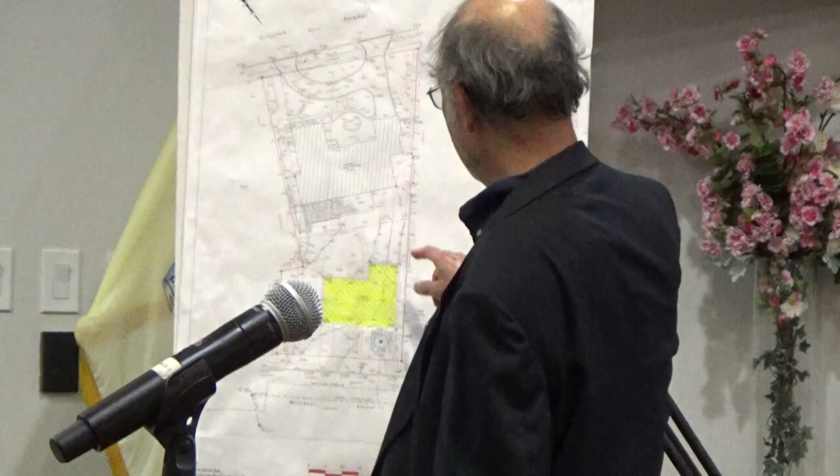I also proposed on the south side of the property, near the subdivision line, a yard drain. The purpose is to collect the water, and all the water collected from the yard drain will flow to the dry well. That will solve the water concern that our client's neighbors have.

How deep is this well? Can I interject? After the last meeting, I met with Ray Cure on Mitchell, and you would not believe how wet it is. Even in his backyard, beyond his backyard, the water just stands.

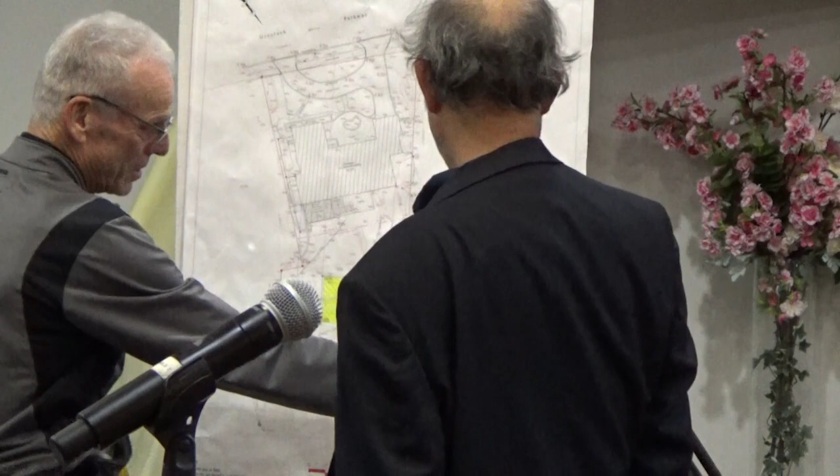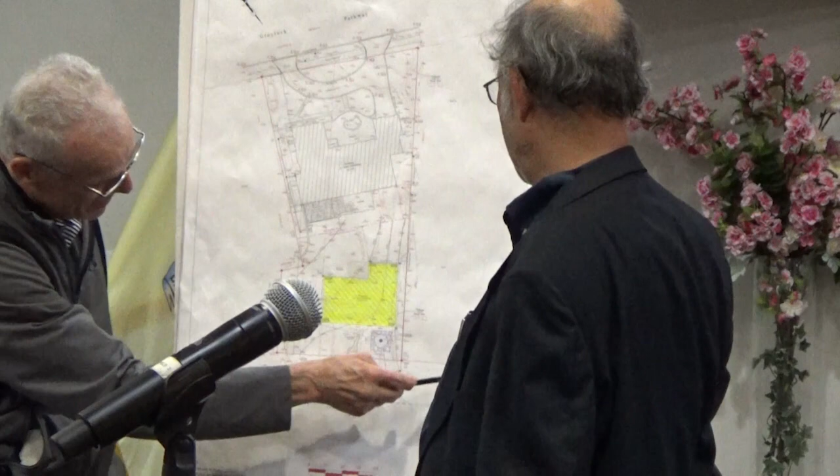I think the solution is, there's an inlet on the street just down maybe 100 feet or so. I think the solution is to get rid of this yard drain, because all you're doing is adding water to the existing water table, which is a mess there. There are some pumps going all the time. The solution is to extend the drainage from here to here, put an inlet here, and then run another inlet up to the yard, swale it, and collect all the roof drains into the inlet. I can work with the engineer, but I think that's the best solution.

And I think at the time I met with Ray, and I forget who the other neighbor was. He's a Yankee fan, I know that. He has a Yankee uniform on. Oh, there he is, okay.

I have just one question. Wait, wait, it's not time for that. I think we talked about it, and I thought that was the best solution for the residents there.

So that would take the water basically off the site. And there's one other thing I want to add to that. Adjacent to the storm pipe that he's putting in, I want him to install a perforated pipe to help collect groundwater and get it into the inlets.

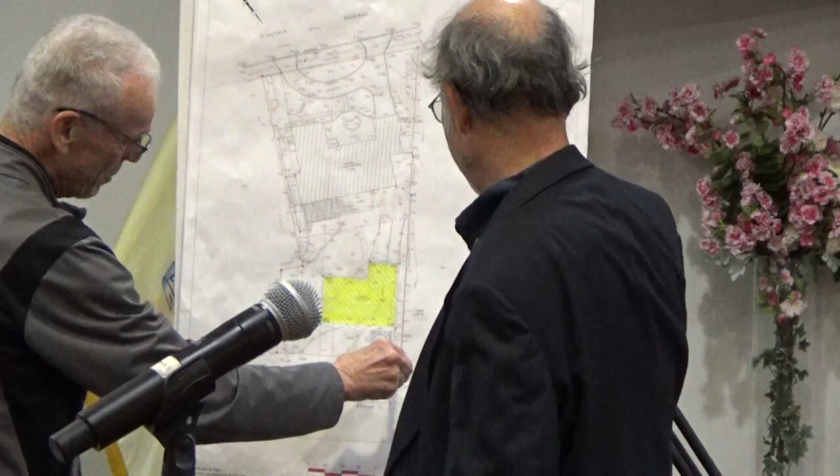So what you're saying, we put an inlet somewhere here? There's an inlet here. You run a 15-inch pipe up here, then run a 15-inch pipe here. You've got to swale all this area and then swale all the property line so it doesn't go to the adjacent property. All the water will flow to here and go to the inlet here. Yes, and then every roof drain's tied to this inlet.

We get rid of this. Get rid of the seep. It's not going to work. You're going to have water. It's going to be filled with water all the time, because this side is higher than this side, right?

So the water will flow to here, but I would say still do the low wall. You can add that. I want to swale between your house, the proposed house, and the property to the west. I can do that, yes.

Okay, so there seems to be some agreement on how that would work, so for purposes of this hearing, I'm going to say, if the matter is approved, that the applicant will work with the borough engineer, town engineer, to create a plan in conformity with what was discussed at tonight's meeting. Correct. Is that okay with you, Tom?

Yes, and just to pre-answer that woman's question: if the inlet's going to be there, I'm going to have him propose to put an E-inlet in, which is a 4x4 inlet, to capture the water that runs behind his house before it gets to the house to the west of his property, okay?

I don't know what an inlet is. Is it a property drain? It's a drain, but it's got a metal casting. It'll be sunk to the ground, and the water will flow into that, capture it, and then a pipe will take it out to the street and then to the other inlet in front of Ray Keir's house. Not like a sewer. It's a storm sewer, not a sanitary sewer. Okay, I can't even picture it.

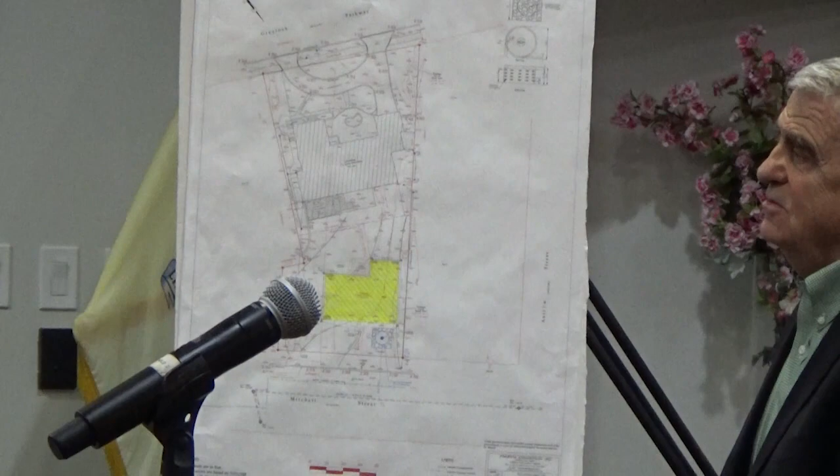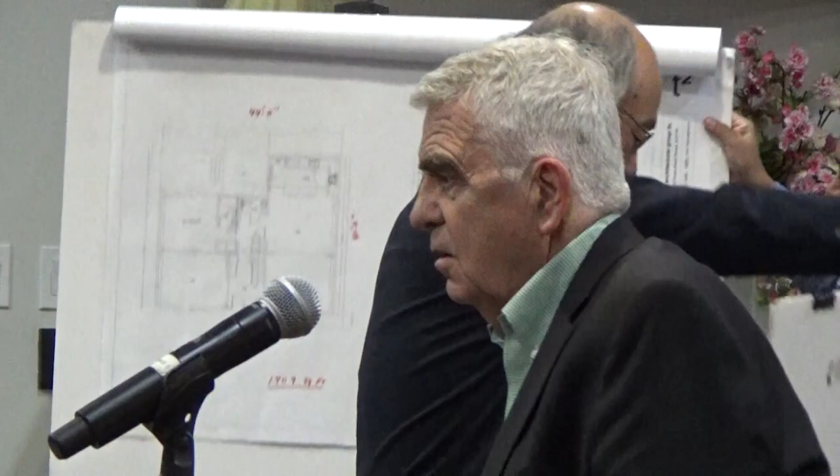Excuse me, Mr. Wu, the architect? Are you the architect, Mr. Wu? No, I'm not, he's the engineer. He's the architect. Okay, I did give testimony at the last meeting. Say your name again, please. John Halsey, architect. I'm just commenting, before we go further, I did give testimony to the architectural plans at the last meeting. I do have questions.

Just to remind you, you're still under oath from the last meeting, okay? Yeah, as far as I'm concerned, yes. Okay, so let me just, so we're clear - no change has been made in the architectural plans since the last meeting? No.

I know Mr. Guines has some questions. Maybe we can, do you want to start with whether or not there's any board questions? Let's start. The clapboard siding - you were thinking something more of a Hardie board. Would that be possible? Yes.

Clapboard siding is a generic term, it could be wood, Hardie. We were just looking at, if we're gonna do something new, on most of our new stuff we like to go with a higher end material. We like to stay away from aluminum, vinyls, that kind of stuff. I agree, I have no problem with Hardie. We like decorative cornice around the edges of the roof, design features, architecturally pleasing, at least on the front facade. The rest of it, we want something better than aluminum or vinyl.

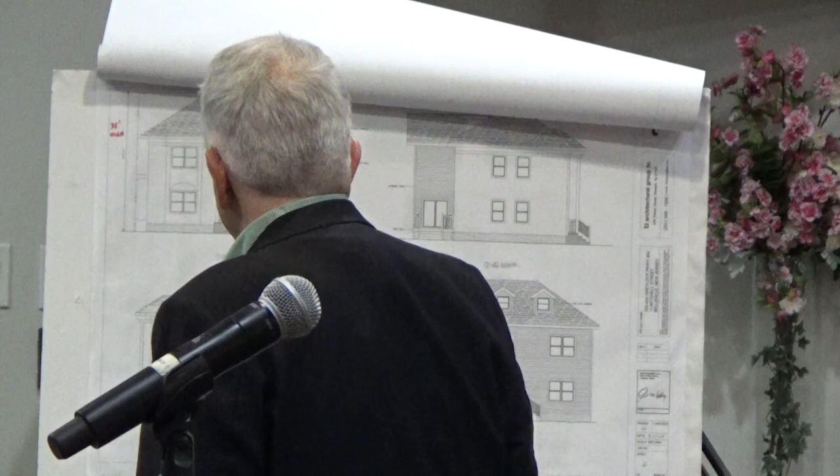Is there any way you can incorporate a little bit more stone into the project? Or brick? It's possible. Could you be more specific? Focus on the front facade, right? Use of a couple different materials - it's fully stucco right now, right? The front, yeah, the footing of the house, and around the sides for a rise. This is a cement foundation basically around the bottom, and then it's the stucco up to the top. Yes. So if you could incorporate maybe 3 different materials

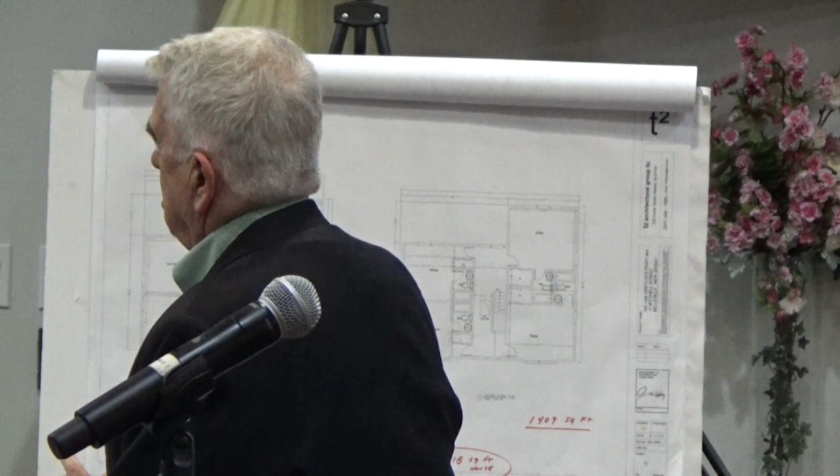into the front facade, and then the sides and rear maybe stick with a Hardie board. Yeah, I said I have no problem with the Hardie plank. Okay, on the second floor there are 4 bedrooms and 4 full bathrooms. Yes. We're thinking 1 master bathroom and then a bathroom for the other 3 bedrooms. We don't feel like every bedroom should have a bathroom. No, I understand. My client, the applicant, requested that to be part of the program, so I would have to leave that up to him.

Are there any other? It's really my thing right now. There's no way every bedroom on the second floor needs a bathroom, it's a little overkill - it's more like a boarding house than an actual house. I mean, sure, I can cut back, but I would like my client - if I can speak to him.

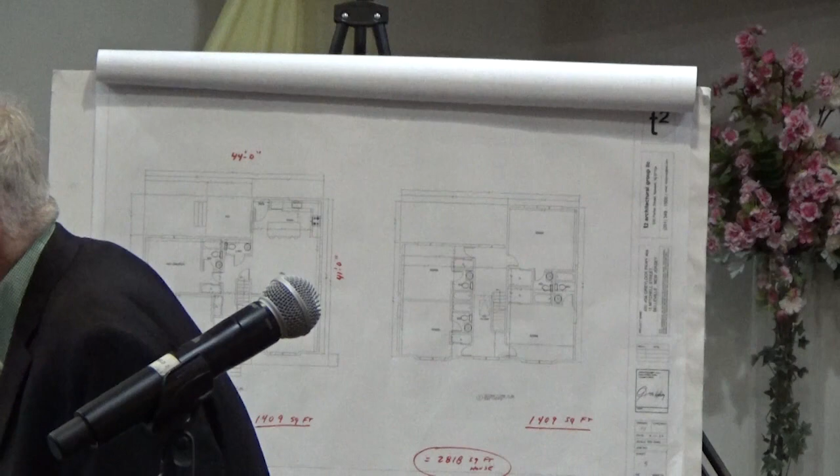Well, let's finish the comments first, because we're talking about the bathrooms. I have a concern that I would like it to come in a couple of feet, because it's sort of on the property line. Can we come in a couple feet? On the side property line? Well, I mean, we're building what's allowed - the footprint is allowable. But you're building something that's big, and the neighbors next door on each side, the houses are not that. Well, if you moved in, it might be more appealing.

Okay, well, before we go further with this, I just want to comment.

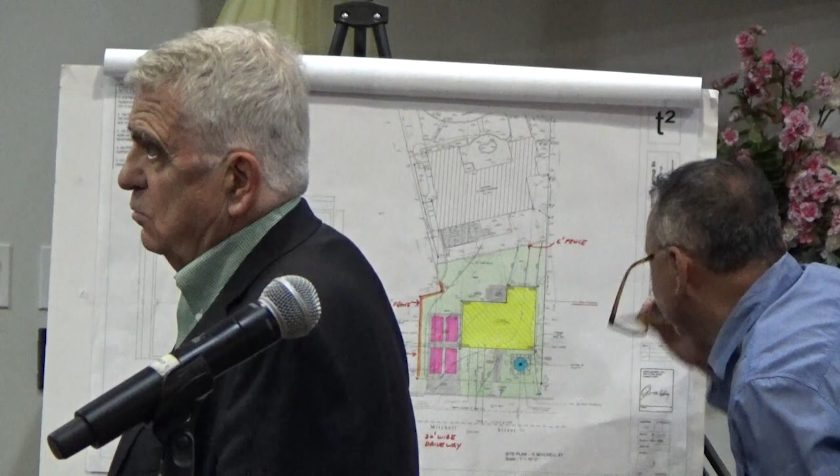I did look at all of Mitchell Street, especially with the intent of understanding the context of the street. I realized the adjacent houses are mainly 1.5-story Cape Cod style houses, but there are also several 2-story houses, some just as bulky, if not more, than this.

So in terms of context, I don't really have a problem with it, but like I said before, we want to please the board, but we are building what's allowed by the ordinance. I understand that, but I'm worried about the neighbors, it being too close, too huge of a house for me. That's just my opinion.

Anybody else? I can go into a little bit of that, so I'm feeling out what you guys are saying. It seems like they want to reduce the number of bathrooms in all the bedrooms. And I'm also seeing that we have 4 parking spaces and potentially 5 bedrooms, which is a mismatch as well. So I think the board would really like to see a parking space per bedroom.

So if we're stretching it a little far right now, maybe if we pull it in a little bit, not only will that make the board happy, but that might also make some of the neighbors happy, if your client is willing to do so.

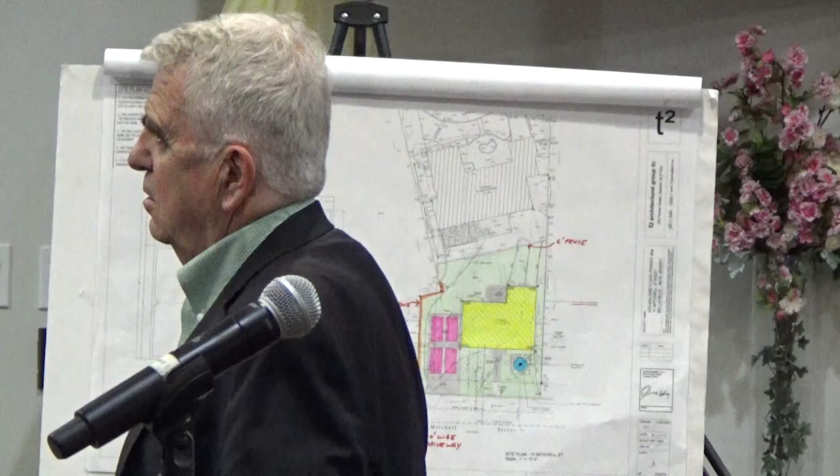I'm telling you that maybe at some point it might be a good idea to take a 5-minute recess and have an actual conversation with your client, because you're getting hit with this without having had a chance to really talk to him, which isn't fair to you either. I think to be fair to you and your client, you're hearing the board's concerns. I appreciate that. I think we should be accustomed to being in this position between you and my client.

Maybe we do that, that's the way my life is. Because we put a couple requirements... are there any other architectural things? Is there anything else, anybody else have any other comments? I would do that before we open to the public for questions, otherwise you're gonna get all questions about this, just stormwater and so on.

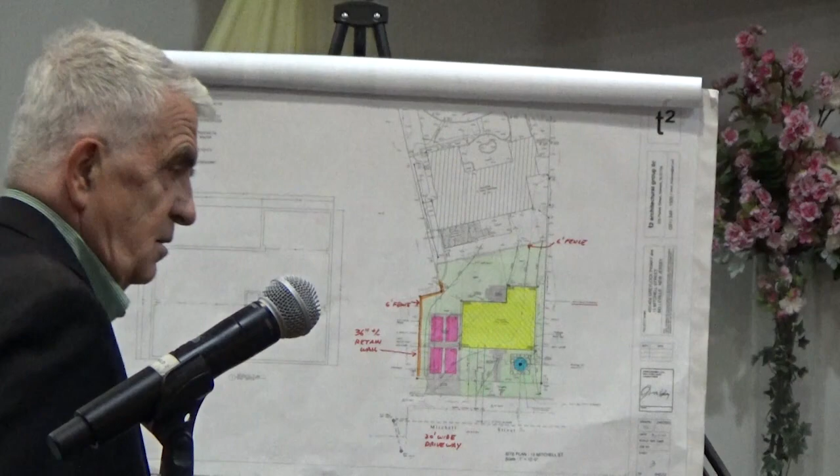You got an opportunity to talk with your client? Yes. Anything you want to add? Yes, I would like to respond to this conversation with the following changes.

We will move in the easterly direction. The east wall, the one closest to the house next door, move that 2 feet away from the property line, so there's a 7-foot side yard. But we would also like to move the other side 1 foot. No, just take 2 feet off the side yard here, but add 1 foot on the shorter segment of the building on the other side.

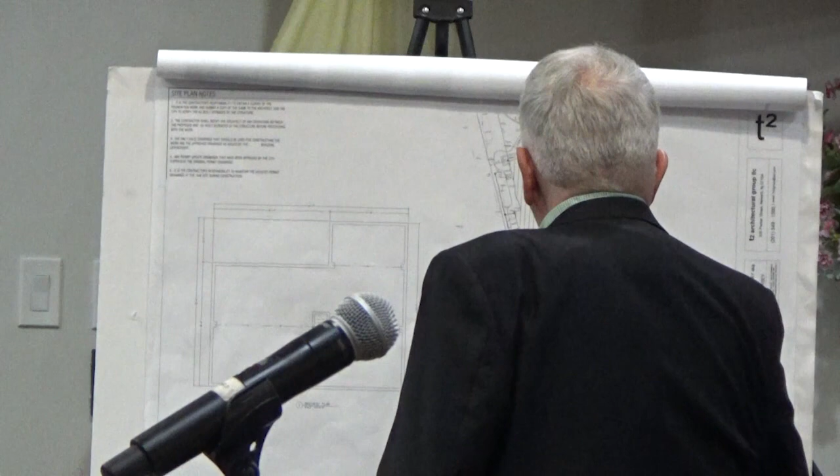I'm not as familiar with that side. Will that create a variance on that side, a 1-foot variance? No, we're not close to any side yard issue, you've got 31 feet on that side, so it's being moved to that side, not creating a variance on that side, and giving an extra 2 feet on the other side.

And there's 31 feet on that side of the house. What was the side you're taking away from now? How many feet were there, and how many now? There's 5, you're adding 2, so it's 5, 7. Sorry, I need this.

Okay, on the site plan, I'm going to use right and left, my directions. On the right side of the site plan, we have a 5-foot side yard.

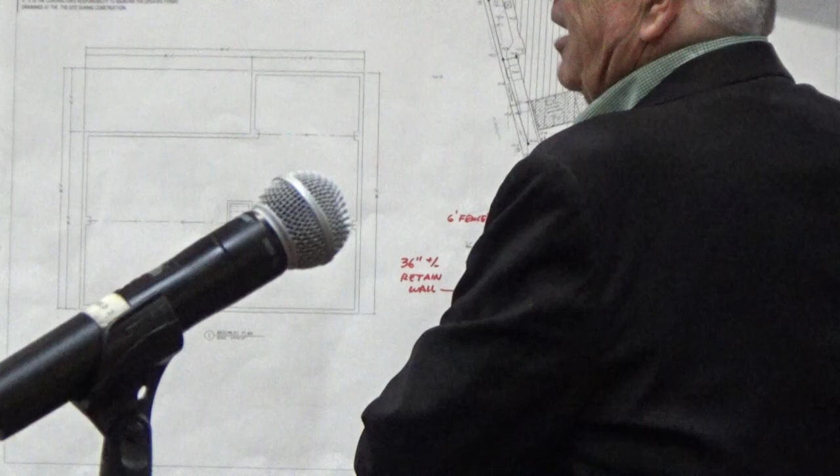We will make that 7 feet, but we want to add, in response to that, 1 foot on the left side of the building. So what will the side yard be on the left side, the east side? Are you sliding the building, or just taking square footage off it? It's 26 feet, yeah, it says 26.

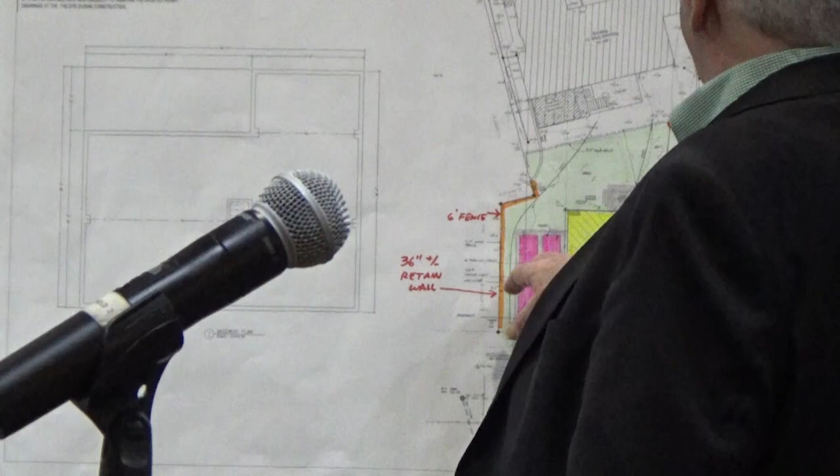The other side yard on the left, where the parking units are, is a 26-foot yard, so that would be 25 feet. Okay, that's more than enough, so that conforms.

So you're not sliding the building over, you're shortening one side? Yes, and adding a little bit on the other. So the house width is 1 foot shorter then? Yes. Okay, and we'll revise the plans to show this, they'll be in scale.

And the bathroom? Upstairs on the second floor, we would like to have the master bedroom with its own ensuite bathroom and closet, and then we will create one bigger bathroom for the remaining 3 bedrooms.

So the bathrooms will be revised from, was it 4 to 2, or 5 to 2? From 4 to 2 bathrooms, on the second floor. 2 on the second floor? Yes. Okay, 2, 3, 3.5. Okay, right? Yeah.

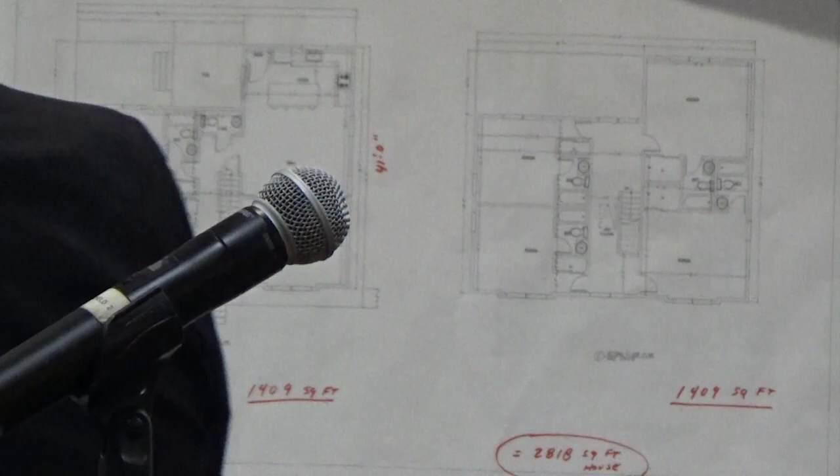We were talking about 5 parking spaces, because you actually have 5 bedrooms. Well, there is a guest room on the first floor, but I want to leave the room there, we'll make that a home office instead of a bedroom. So the solution to that would just be to add one more space.

You have the driveway right next to the house, right? It's 2-car wide and 2 deep. The one closest to the house, you could technically add another spot, go 3 deep. That'll get you to 5.

I would want to speak to my client about that. The problem I have with it is that we'd be taking away landscaping, parking spot, lawn area and so forth, and adding impervious area. What do you guys want there?

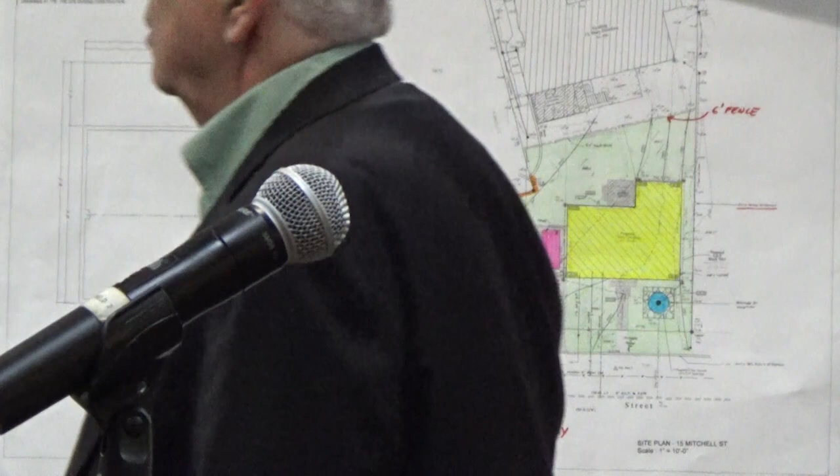Parking is always an issue. If you can keep a car off the street and pull into the driveway, we'd rather have that. Okay, well my client has agreed to adding a 5th parking space. I don't agree with it myself, but that's okay. It's one of the struggles of the neighborhood, I want us all to agree. Yeah.

Can we just get a recap, so there's gonna be 2 full bathrooms upstairs? Yes. And what's gonna be down here, is this the same, half bath? There's a half bath and a small full bath.

And you say you're not making a guest room, you're making it an office? Well, we just added a parking place. So is it gonna be a bedroom or an office, you need to choose one or the other to get from Mr. Young's issue, so it can be a bedroom or a home office, so that it conforms.

So there's gonna be 3 full baths in the whole house? Right, so 3.5 baths, 3 full and 1 half bath. There's a half bath also, just for guests at the end of the hallway.

Is that everything? I'm good. It's good? All right, any other requests? I'm gonna close this portion and open it up to the public.

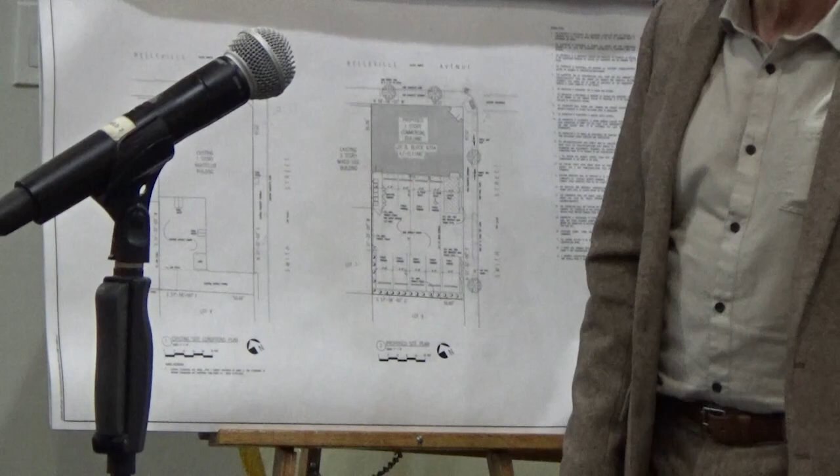Now, would you go on to describe the proposed structure and the proposed site for 215? Okay, so what's being proposed for 215, let me get out of the way so people can see. We've got the existing site here, and we have the proposed site here. So what's being proposed for 215 is to demolish the existing building and to build a 1,711 square foot, single-story commercial building, a little bit higher ceiling height than what's there right now. I'll go into the interior floor plan in a second.

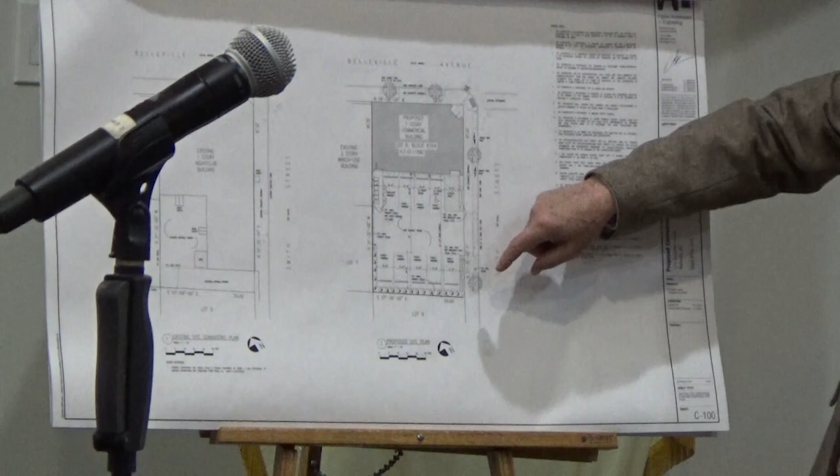The remainder of the site to the back is a parking lot with a single driveway off Smith Street, and then spaces up against the back of the building, and against what would be the south side of the property. There's a narrow buffer of landscape shrubs around this corner. A 6-foot vinyl privacy fence has been proposed to enclose the parking lot from the adjacent yards. A small fenced-in trash enclosure in this corner here. There are, as was described previously, 9 parking spaces.

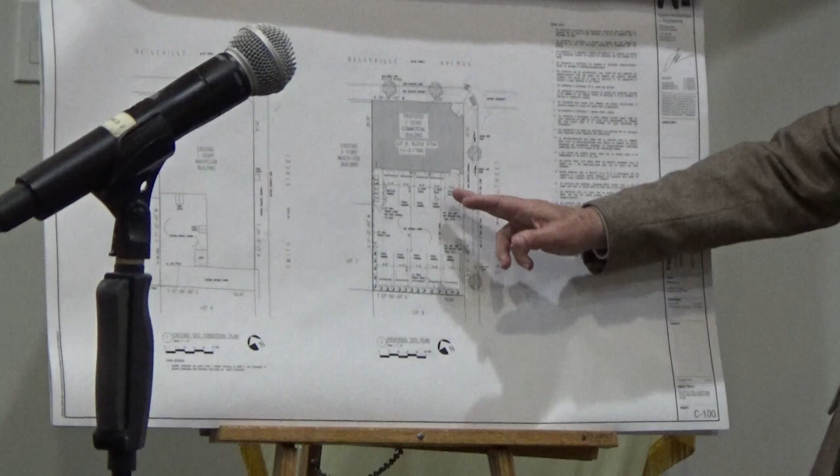The agreement here is that one of these spaces would be dedicated as an employee space. One would be striped as an accessible parking space for passenger vehicles, and it would also be van accessible because there's an 8-foot access aisle next to it. The remaining 7 spaces, as well as the handicap space, would be open public parking with the understanding from the township that that will be metered public parking. We'll go into it later. There's the opportunity for this to be accessory parking to the other building, but overnight, because during the day this would be metered public parking, serving both this commercial space and potentially other businesses on Belleville Avenue.

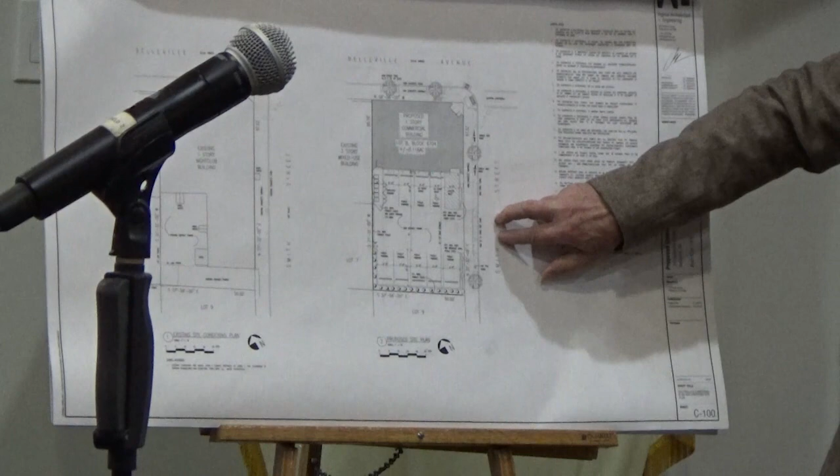Just briefly describe the ingress and egress to those 9 parking spaces. You would come in the driveway off of Smith Street. There's an access aisle 22 feet wide down the center, and then you would either pull to the left into a space or pull to the right into a space. It's a typical, double-loaded parking layout.

So we'll stick with 215. Describe the proposed structure. You have some architecture, I assume, with regard to that. Yes, indeed.

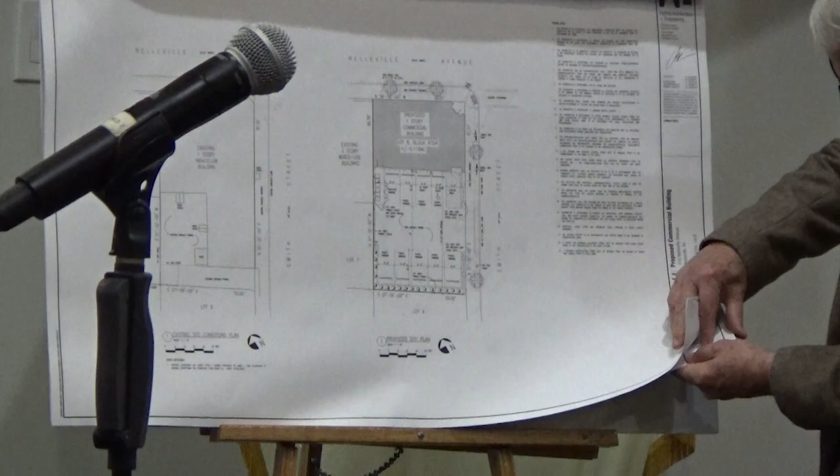So again, it's a single-story building. There's an angled corner entrance at the intersection. There's large storefront openings on Belleville Avenue and 2 on the Smith Street side.

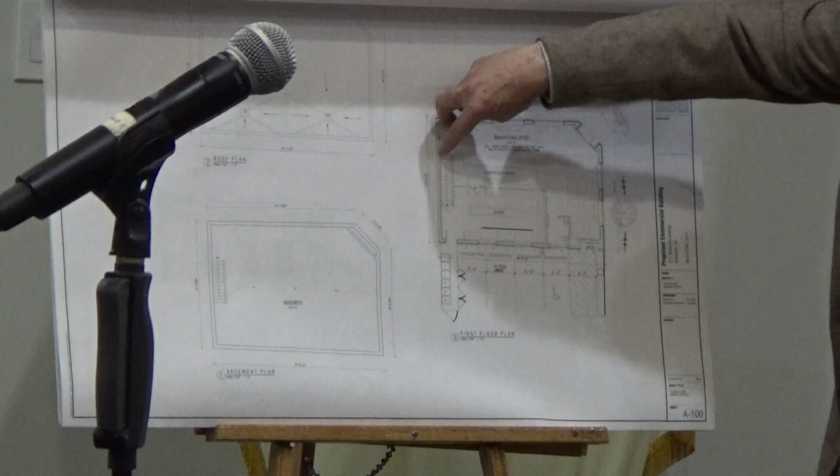When you come into the building, there's essentially an open L-shaped customer area with some open tables, counter bar seating at the storefront windows on both sides, and a customer counter, with the back left corner dedicated as prep and kitchen space, which has a stair down to a basement available for storage and other utilities for the building.

There's a single unisex accessible restroom available for customers and staff. There's a little inset in the building towards the back to shield the electric and gas meter.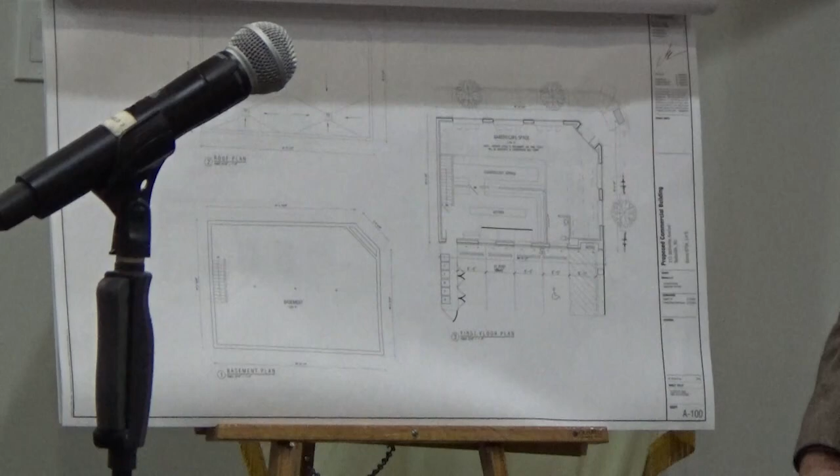And then there's a back door to the parking lot, which is primarily service, giving access right out into the trash enclosure. Customers would park in the lot and then walk to the corner and come in the one public entrance.

The parking lot is separated from the neighbor's yards by a privacy fence, and demarked from the Smith Street side by masonry piers and a wrought iron fence in the two landscape strips on either side of the driveway.

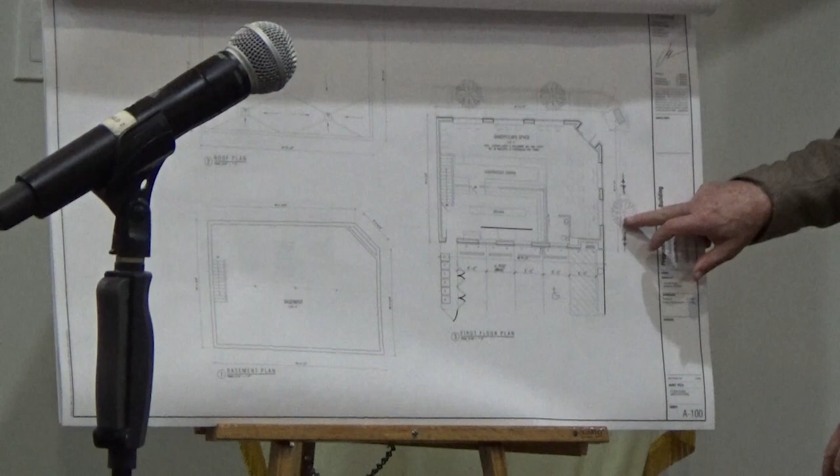So you can see into the parking lot from the street. There's no intention to enclose the parking lot since it's public parking, but there's some separation between the space and the sidewalk. What we've shown so far is 2 bike racks out here, a new street tree on Smith Street, and 2 new street trees proposed on Belleville Avenue.

And we'll look at the outside. Actually, this is better—this is the view on Belleville Avenue.

So there are these tall 9-foot-high storefront windows, 3 bays of that, the inset corner entrance with a fabric canopy over it, and 2 more entrances with 2 more storefront windows on the Smith Street side.

A band flush with the wall on either side that would be dedicated for signage. A 2.5-foot-high decorative wood cornice at the top. The rest of this facade is brick with cast stone lintels and sills.

And then on the parking lot side, this is the elevation that faces the parking lot. While most of this is kitchen space, we've designed this to have insets in the brick with high windows into the kitchen, and a high window into that customer area over the meter enclosure.

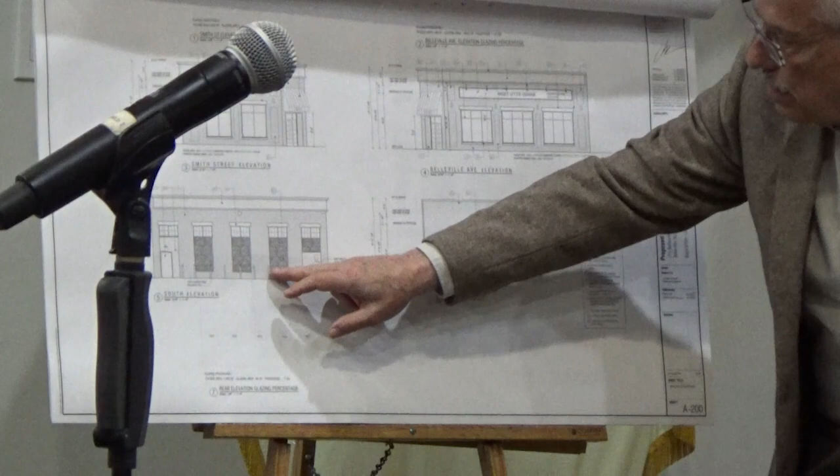This other area below the tall windows is designed to have a stainless steel grid system on it. It's a product called Living Wall that contains containers for plants to grow on a grid, so this would be greenery on the wall. And then there's the service door, and the cornice wraps around the back as well.

And then the west elevation—it looks pretty bare because for its entire length it abuts the neighboring building. We have very close to zero setback there, but they are separate structures.

I could probably address the gentleman's question from before. Yes, this building is being demolished—the building that's there right now is going to be demolished, and it is right up against his building.

Based on current standards, the building department is going to want to see some supervision of the demolition work in order to protect his property. Most of what comes down on that side wall is going to have to be brought down essentially by hand. Some of the building can be brought down by machine, but when you're that close to someone else's building, you're not going to use a backhoe to pull a masonry wall down. So building departments are better at that right now, and they want to see that you have a plan for that, and that someone's overseeing the workers doing that.

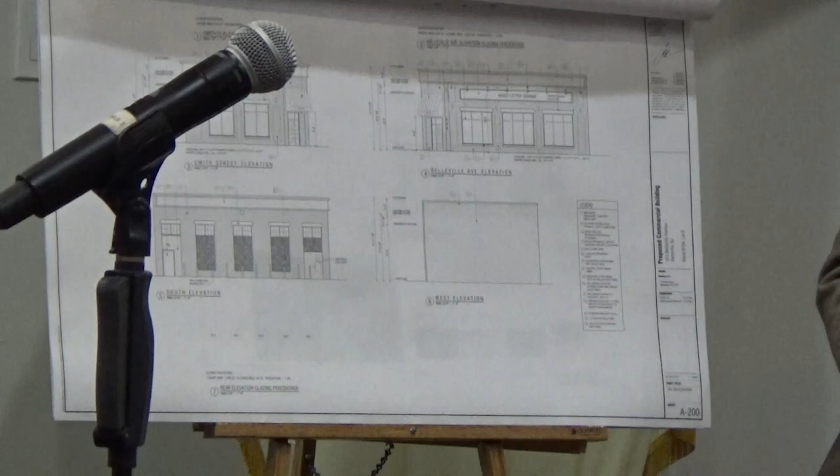Okay, let's talk about the 202 lot, and the proposed structure to go on that.

Let's discuss that generally. So on the 202 lot, what's been designed is a 4-story, 17-unit multifamily building. The residential units are all on the top 3 floors. The first floor is indoor parking and utility space and lobby, and I'll show you the plan in a second.

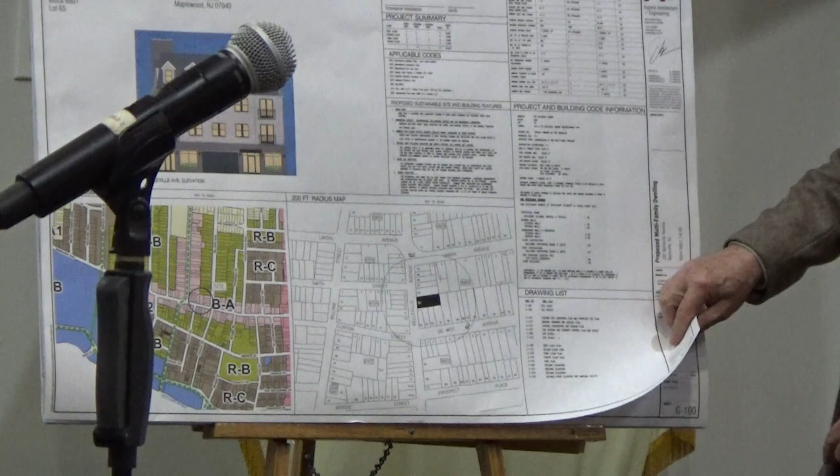Let's go with the site plan first.

This building occupies the majority of the lot. It's set back 15 feet. The upper portion of the building is set back, and the garage too, is set back 15 feet from the back property line, but the garage itself is essentially lot-lined on both the east and west sides and at the front. And at the front, there's a recessed entrance to the main lobby.

There's an overhead garage, motorized controlled garage door, and there's another entrance that's recessed over here, called an entrance, but it's essentially an exit. This is the doorway you'll see on the elevation on the left, which is essentially the exit from the second fire stair. But there are 2 stairs in the building.

You come in the garage, there are utility spaces here on the left: water meter and sprinkler room, electrical service equipment, and a trash room. On the right is a lobby with a separate package room, access to the second stair, direct access then to the elevator that takes you upstairs, elevator machine room, and then the rest of the back here is a handicap accessible parking space.

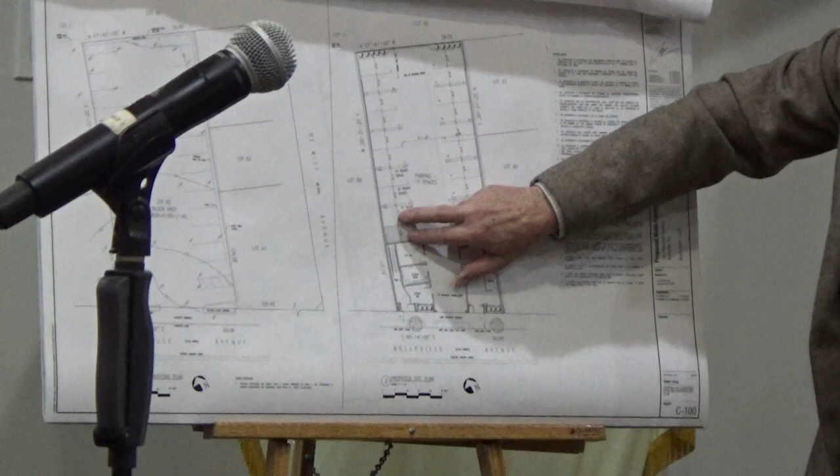Bike storage, which we'll go into later. We showed them as being on the ground, but this is actually going to have wall-stacked storage on both sides of this space in order to get 17 bike spaces here. We only show, I think, 9 right now as just a single, like you pull it in and lock it. But then the rest of this is 17 parking spaces, one of which is handicap accessible.

I forgot to mention before that in that other parking lot, one of those spaces, well, actually the handicap space and the space immediately to the left of it, will have access to an electric car charger. There'll be 1 car charger on 202.

This building requires the availability of 3 car chargers. New Jersey regulations now are 15% of the parking spaces have to be EV ready, and 5% right now in 2024 need to be EV available. So that means you have to run the electric and the utilities for the equipment for all 15%. In this case, that's 3 spaces. And you have to have the equipment available immediately for 5%. We're showing 2 double-headed car chargers, so that actually gives the availability for the handicap space and 3 other spaces to actually use those chargers.

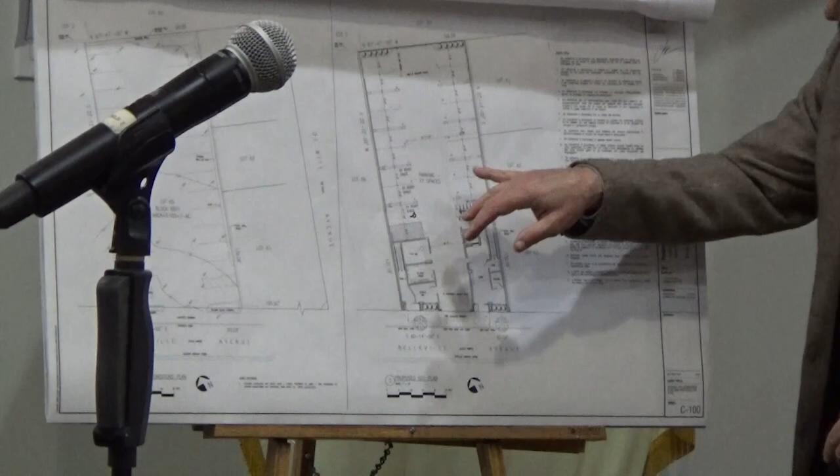Everyone that has access to this garage would have a controller like you would have on your private garage, so you could open the door, close the door. There'll be a rolling overhead door here. You come in the garage, there's a 2-way access aisle, and then again, you either pull into a space to the left or to the right. This one has a 21-foot, 7-inch aisle in the center, and then essentially 9 by 18 for the most part. I think the smallest spaces in this layout are 8'6" wide, the majority are 9 foot wide. So again, it's just like pulling into an aisle of a public parking lot where you're parking to either side with one common access aisle down the center.

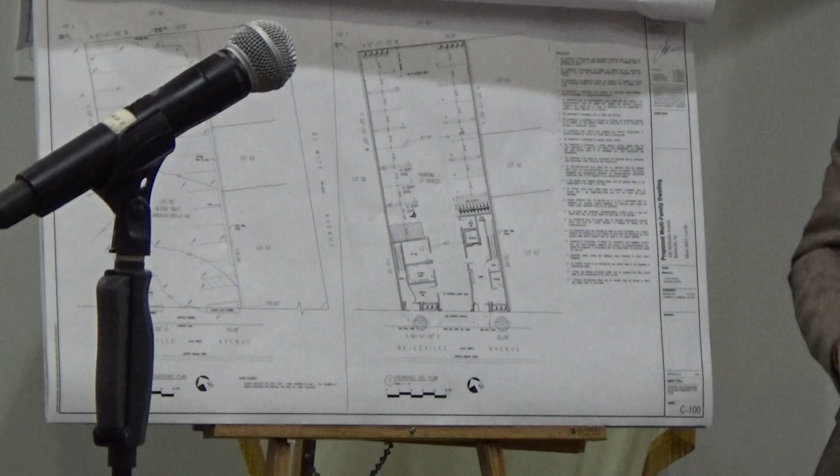Thank you. You were about to go describe the building, you can continue with that, I think. Yeah, I was going to finish the site plan, that was actually bigger.

On the upper floors, to get this to work, the building is now turned 90 degrees, so I didn't mean to confuse people, but this, the right-hand side, is the Belleville Avenue side. When you go up to the second floor, you either come out of the elevator or you can go up one of 2 enclosed fire stairs. And what gets created up here is sort of a T-shaped corridor, and then a 2-bedroom unit, a 1-bedroom unit, 2 2-bedroom units in the center, a 1-bedroom unit, a 1-bedroom unit, and a common fitness room.

This is the second floor plan, and then there's just minor variations as you go up to the next 2 floors, where the fitness room disappears and it becomes a 1-bedroom and a 2-bedroom at the back. The rest of the front is exactly the same.

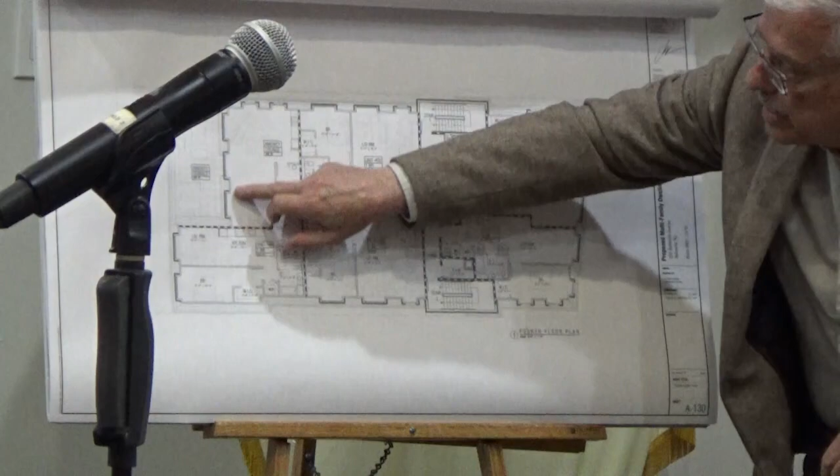When you get to the top floor, the plan gets a little fussy looking, because in elevation we've created a mansard roof for the top floor, so the outside walls squish in and there are dormer windows. Essentially you get a 2-bedroom, a 1-bedroom, 1-bedroom, 1-bedroom, 1-bedroom, and then the back left corner has an amenity lounge and a small common outdoor roof terrace. We cut away the back corner of the building at the 4th floor to create a second common amenity space.

This is what the building looks like from Belleville Avenue. The palette here is similar brick, similar gray brick at the first floor, dark gray cast stone, a metal canopy over the main central entrance, and a painted metal minimalist garage door pulled in. The second 2 floors are hard coat cement stucco with score lines and raised detail around the windows. The windows and doors are all black, with black railings at some openings designed as sliding glass doors with a Juliet balcony, essentially a railing just outside the door.

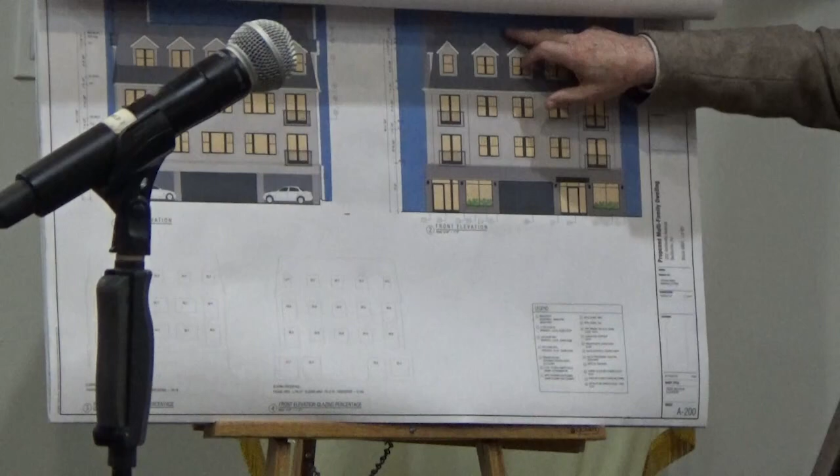So it's a mix of double hung windows, sliding glass, and Juliet balconies. The top floor has architectural gray shingles on a steep mansard that goes up to a parapet on the roof. The windows at the upper floor are treated as dormers poking out of that mansard treatment, and that goes all around the building.

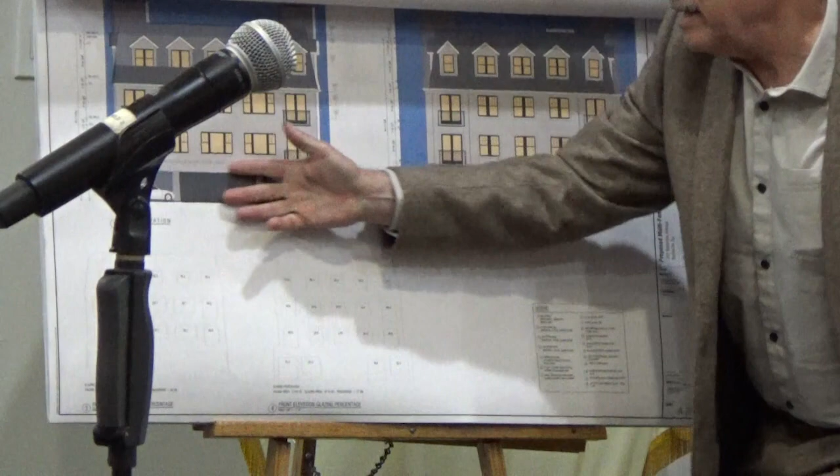This is the rear elevation. In the rear, if you were on the ground, you'd be seeing into the garage, because the garage is open at that end. Then there's the same treatment at the second floor and the upper floor, and you can see the mansard roof wall at the top of the terrace and the door into that amenity space.

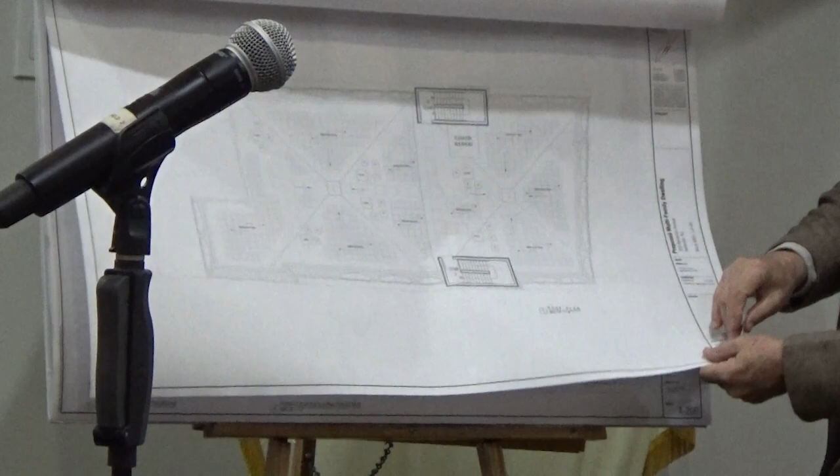On the sides, this is the west side, facing towards Union Avenue. I should go back and look at the setbacks here. The first floor is essentially zero setback. The upper floors jog in minimally. The stair tower is the closest, it's a foot away. This wall on both sides is 3.5 feet away from the property line in order to do windows in those frontages.

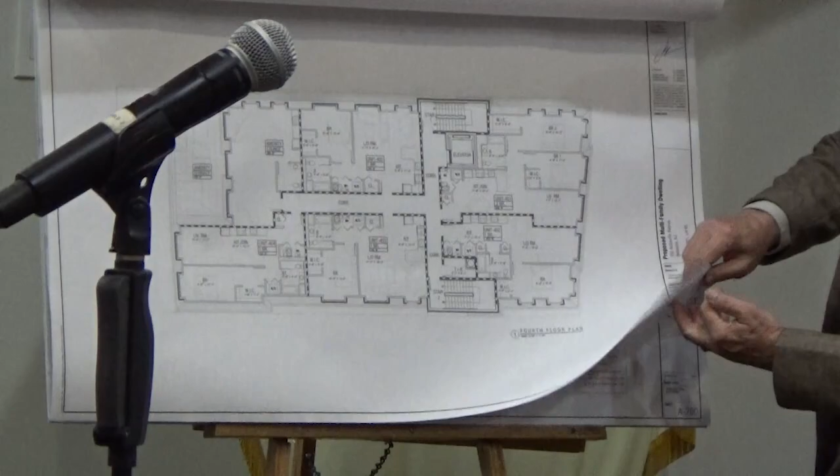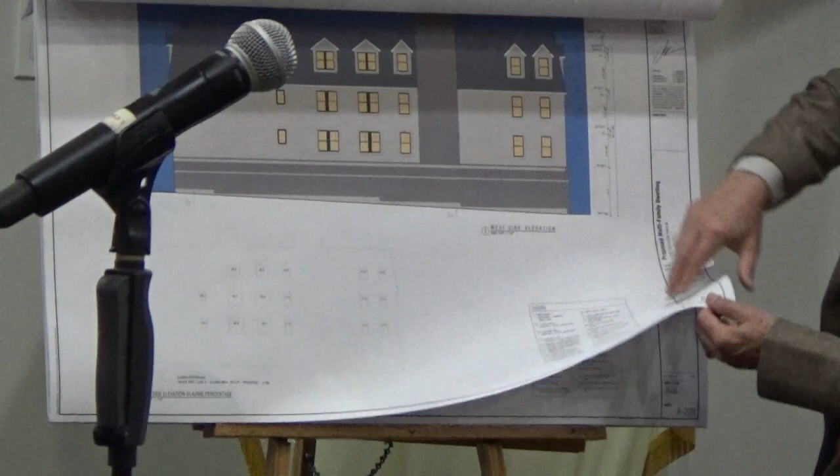That's what you're seeing here. You've got a section of wall that's pulled in and has windows, a section of wall that's pulled in and has windows, and then a section of wall that's back out another foot that doesn't. The dormer window treatment again. The brick continues on the side along with the cast stone trim. The opposite side, facing the DeWitt direction, is essentially a mirror image, except you also see the cutaway for the amenity terrace at the top floor.

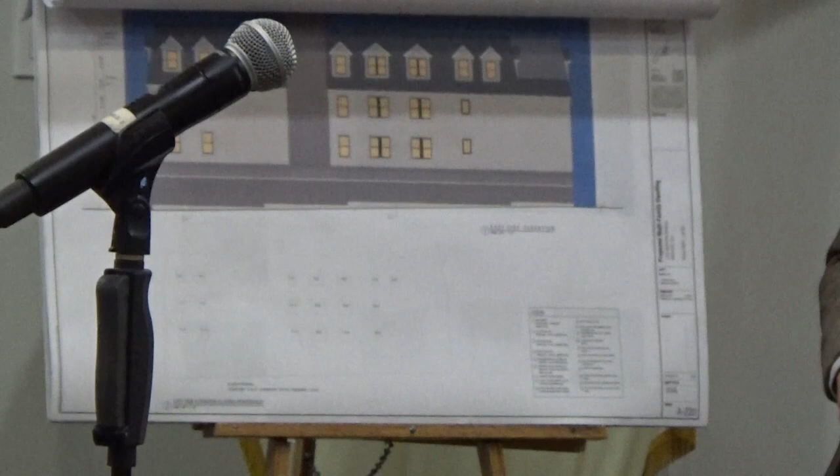Now, I failed to ask you when dealing with the other property, are there any bulk variances whatsoever on this project? No, this application requires no bulk variances at all. The setback, coverage, height—it's designed to fit in the redevelopment plan's bulk requirements.

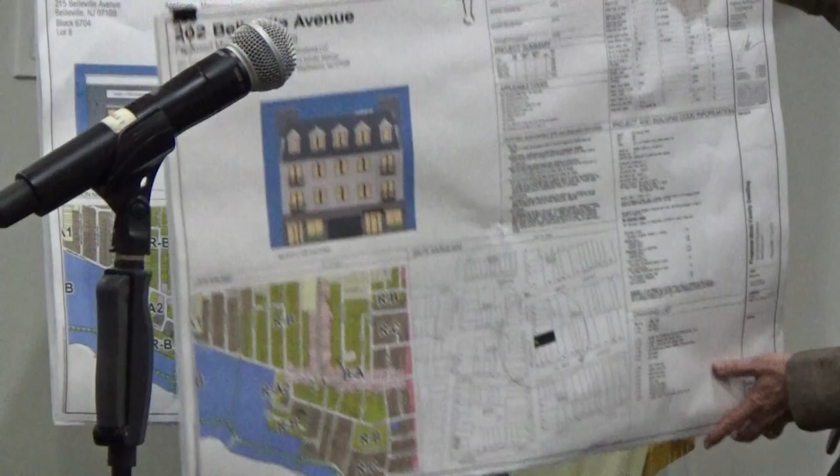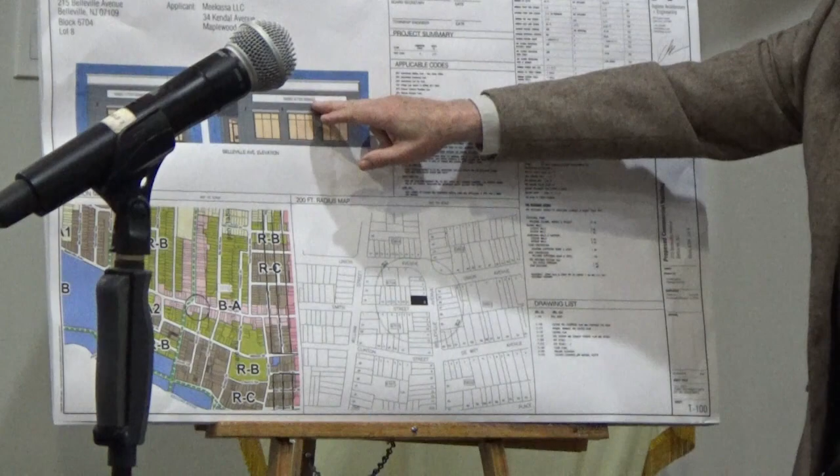Going back across the street, any signage on that building? On 202, yes, there will be signage, and what we've identified in the site plan application are white surface-mounted panels where signage can go, but there's no design right now for the text or visual of the sign, because that will happen at the next step. What we've shown you right now is as much as can be described as a vanilla box for a bakery cafe. When an operator is under lease, it'll have a name, a theme, and they'll want to design a sign. We'll have to submit that to planning staff and/or come back to the board for any aspect of the tenant fit-out that requires such approval.

Before we get into responding to the two reports, I have one more question: garbage, how will it be removed from these two sites? For 215, there is an enclosed trash corral in the back corner alongside the last space. The intention is that there would be a series of six 35-gallon covered wheelie bins for trash and recycling. This being a commercial space will have private pickup, so those bins would either be taken out of the enclosure to the curb by staff or by the hauler when scheduling pickups.